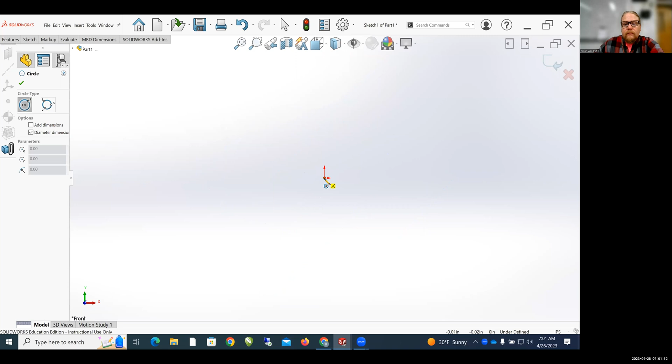And so I'm going to do a new sketch, and I'm going to use the circle tool. Okay, I'm going to start on the front plane, and I'm just going to make a circle. Now, the size of your wheel really depends on how big you want to make your wheels. I'm going to start by maybe making some back wheels. And I'm going to smart dimension this, hitting the S key and clicking smart dimension, or the sketch tab and hitting smart dimension. And I'm going to make this wheel 6 inches large.

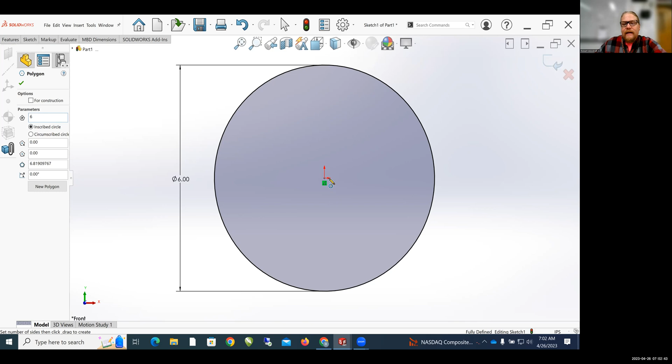Okay. So now what I want to do is I want to put a hexagon in the center for my pencil to fit into. So I'm going to go back to the sketch tool and go to the polygon tool and make sure that it says under parameters that it's 6-sided. I'm going to start at the origin. And I'm just going to take this straight out. I'm going to look for that horizontal flag. I'm going to click the left click again to make the polygon.

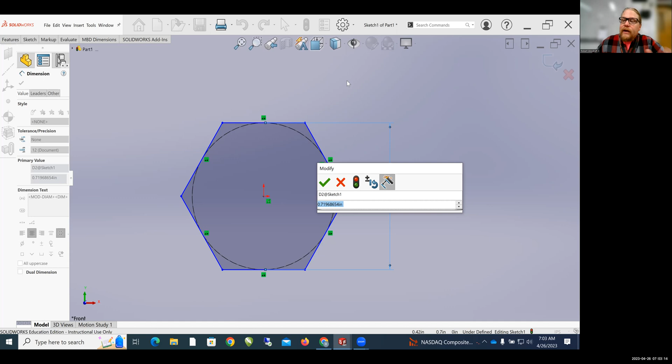I'm going to hit escape and then go back to smart dimensions. And I'm going to zoom in, and I want to select the circle to define my polygon. So we used a specific size when we were making the 3D printed part for the wheel hub. This needs to be a separate size because we're going to cut it with the laser cutter, and so it needs to be a slightly different size.

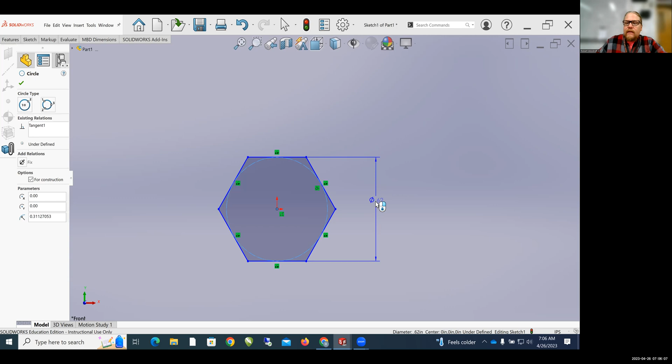So because the laser cutter creates holes that are 0.02 inches larger than what you put into the computer. Well, the diameter of the pencil is 0.265 of an inch. So what we need to do is we need to make this hexagon 0.245 of an inch. We have to subtract 0.02 of an inch. And I'm going to click OK on that. Okay, so now I have the hole for my pencil, or specifically a hexagon hole.

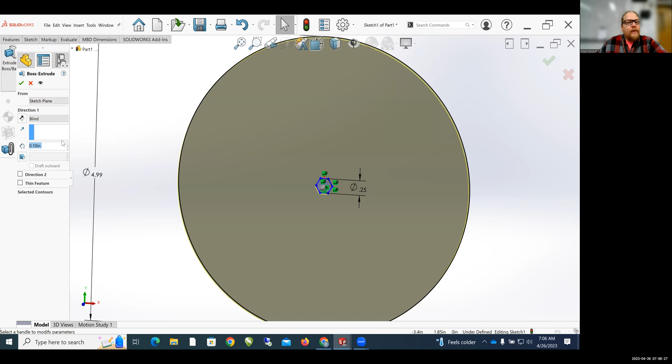So now I'm going to hit escape to get out of smart dimensions, and I'm going to extrude this. And I'm going to extrude this 0.1 of an inch, the general size of cardboard, although cardboard varies obviously in size and thickness. So, okay, now I have my basic wheel, but I need the little holes for the wheel hub to fit, for the hardware to fit.

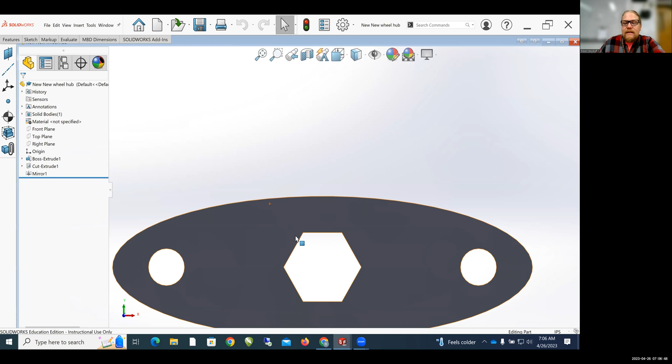So if I go back to this, this is my wheel hub. And so let's look and see what we made these holes. So we made this hole 0.15, right? And we made from the center of the hole to the center of the hexagon 0.65 of an inch. So let's go back to our wheel and finish up the wheel really quick.

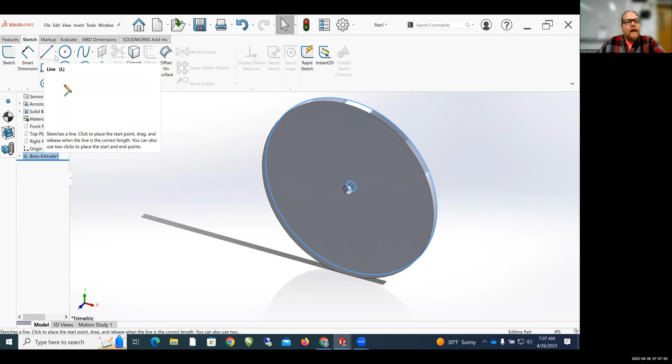So I'm going to go to the sketch tool, and I'm going to start with the center line. So the little arrow next to the line tool, the center line tool, it's going to ask what face or plane we want to draw on. So I'm going to click on the front of the wheel. And I'm going to start from this midpoint, going straight through the origin, making a horizontal line to the other midpoint. Okay, so now I've got the center line that I can draw on.

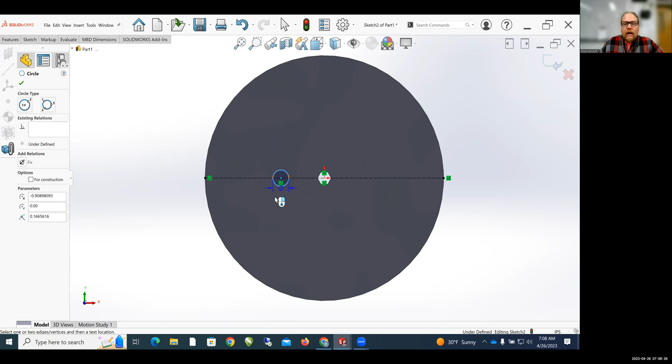I'm going to hit escape, go back to the sketch tool and go to the circle tool, and I'm going to create a circle right on that center line. Right now, I'm going to escape into smart dimension. And what we need to do here is we need to make this hole smaller than we did in the bracket, again, because the laser cutter is going to cut out extra material. And what we found is for the hardware that we're using, if we use 0.125 of an inch, that seems to work pretty well. So I'm going to try that, 0.125 of an inch.

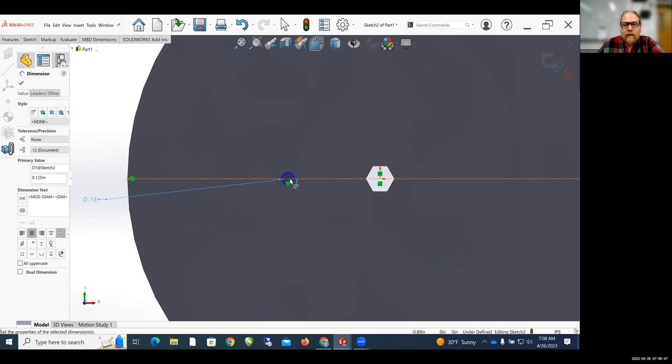Okay, and so there's going to be my hole. And then we just need to set the center of the hole to the origin, or the center of the hexagon. We need to make that, I believe, 0.65 of an inch. Let's just go back and double check that in the bracket, or in the wheel hub. Let's see.

Yep, 0.65 of an inch. That stays the same because we're going center to center. So even though we change the diameter of both the hexagon and the circle, as long as the centers are the same distance apart, we should be good.

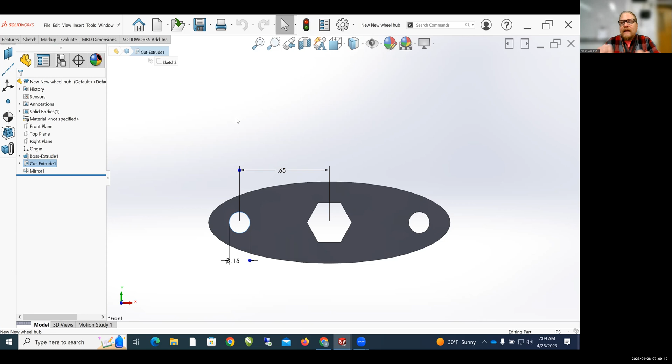Okay, so I'm going to go back to my wheel, and now let's cut that. So I'm going to go up to features, extruded cut, and I'm going to change blind on the left-hand side to through all, and green check mark, and I'm going to cut that. Okay, so now we have one of my holes. So now let's mirror this.

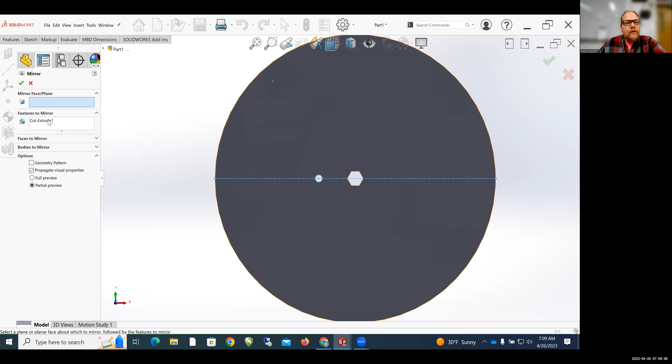So go to features, mirror, make sure that under features to mirror on the left-hand side, it says cut extrude. Again, if that's not there, we can come over to the right-hand side here to this feature tree in the drawing window, click the little down arrow, and find that hole, which is cut extrude 1. Click on that, and it comes into features to mirror.

Now we need to select the mirror face plane. So I click that window to turn it blue, come back over to this feature tree, and I need to select the right plane. That should work. I don't know why that's not working. There we go, right plane. And so then you can see my preview of my new hole. I click the green check mark and there I have my wheel. And now that should fit really well in with my bracket.

And so I'm just going to save this. I'm going to go to save as. I'm going to make sure that I'm in the right folder. So this PC, right? And then the student read write drive, and then the Mr. Woodruff folder, and then find your period folder and save it into your folder. I'm going to save this into, I think I've been using period 3, Mr. Woodruff 2, mousetrap cars, my mousetrap car. I'm going to save it in here, and I'm going to call this new wheel. Okay, and I'm going to save that

as a SolidWorks part. Now to cut this out on the laser cutter, I need to save this as a DXF file. So I'm going to go to save as, and it should already now be in your folder. You can see that pathway up here, CHS student, Mr. Woodruff, period 3, Mr. Woodruff 2, mousetrap cars, my mousetrap car, right? Yours should look similar, but with your name after your period. So I'm going to change this to what's called a DXF file, and I'm going to hit save.

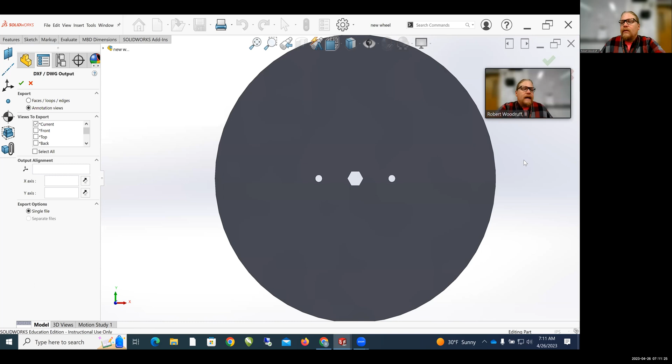Now it's really important that you hit the green check mark up here in the upper right-hand corner. And what this is going to do is it's going to show you the DXF file. And if you have any extra lines in here, you can click on those lines and click remove entities. But this looks good. I'm going to hit save. And as long as it's in the shared drive, we should be able to cut it on the laser cutter.

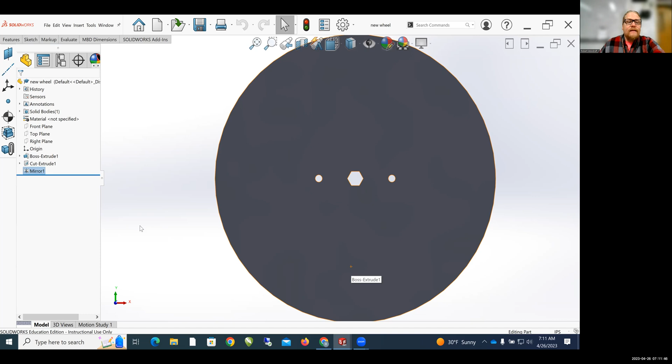Now, if you want to go back and change your wheel size, that's really easy to do. What you're going to do is come over here to Boss Extrude 1 and click on Edit Sketch. And then right here, see, we can change the size of our wheel. Oh, look, I did not make this 6 inches like I thought I did. So now I'm going to make this 6 inches, and boom, I changed the size of the wheel.

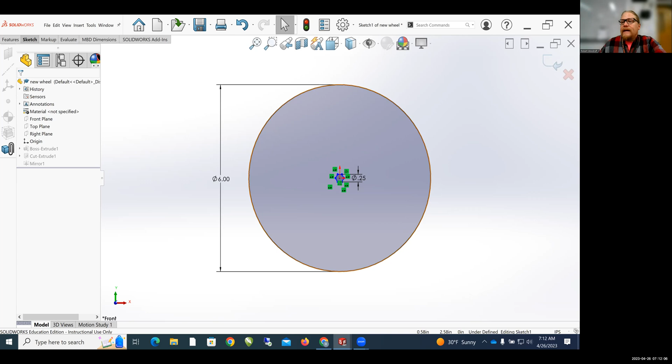Click the green check mark, click the exit up here in the upper right-hand corner, and my wheel has changed sizes. So apparently I didn't even save this as the right size of 6 inches. I saved it as like 4.99 inches, but you see how easy that is to change. You just have to find the feature and click Edit Sketch, and then go in and edit that sketch and exit back out. Now I need to resave this though, so I'm going to save this first as a SolidWorks file. I can just press save.

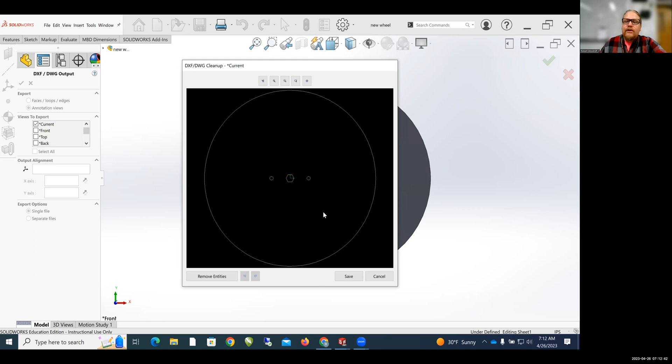The default is SolidWorks file, and then I'm going to hit save as, and I'm going to do the DXF file again. So DXF, save. It's going to ask me if I want to replace it. The answer is yes, right? Green check mark in the upper right-hand corner. I just check the DXF file, see if there's any extra lines. If there's not, I just hit save. So I hope this was helpful.